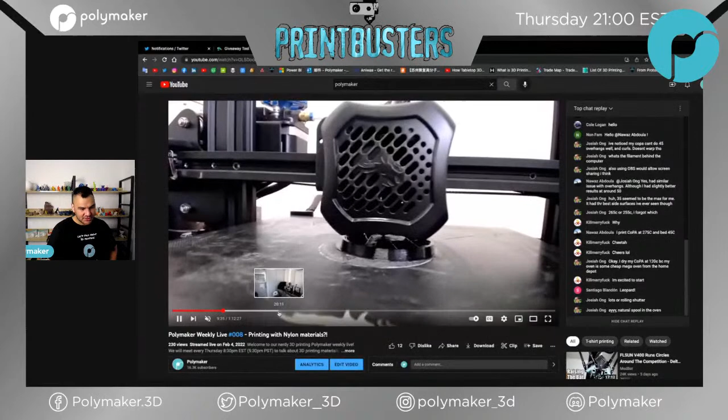Well, you're not seeing exactly that I started the print. Maybe later, I think I'm starting a print. Maybe I fail, maybe I asked someone to start for me before the stream. Let me check. Oh my God, I always talk too much.

Nawaz Abdoula was there, who else? Josiah was there, Loyal was there. Oh, I missed some of the names. Let me check, yeah maybe did I? Oh yeah, I think I started one, at least one. So here's the proof that I may be able to use a printer.

Everything causes warping.

Has Nick ever printed on stream? Pretty much that's how they do it, I would say. But then it's strange because I look at the chat and it's below, but it's okay, close enough. We're looking forward to seeing your print. Hey, Sweetie Q, Stephanie is here.

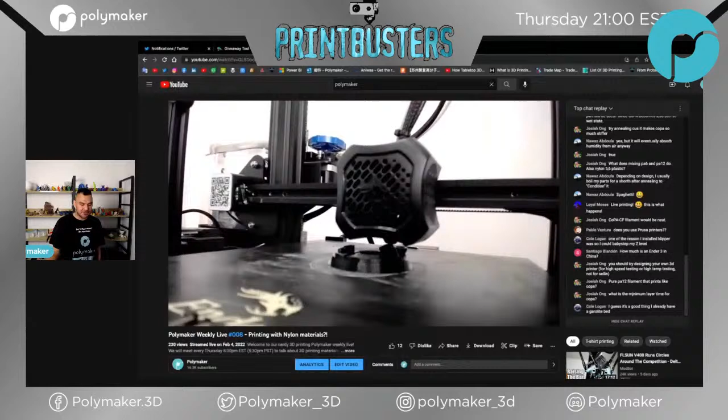What is Click Print? Click Print 3D - you should have followed last Wednesday's stream, but no worries. I will be using this pretty much all the time now that I have my printer at home.

Kenneth Tseng, so happy you have YouTube right? Fake news, look at this. People were saying it's impossible to print CoPA, the material scientists say, blah blah blah, and then that's what I did on stream. I explained my setting and stuff. At that time, I could not share my screen, so I think I was showing off the setting by just putting the camera pointing at my screen.

So I have to say it's very disturbing to have the setup reversed, so maybe I will put it back. It's so disturbing, like usually I have the chat here and then I'm interacting with the camera, I just see the chat. But now I'm looking here and I'm like, I don't know.

I feel too strange. Click Print is a remote management and monitoring software, see Nicolas' last video. Yeah, I'm not sure if people are gonna go through the 3 hours to know what Click Print is. I think maybe on 3DQ YouTube there is a summary, because if someone asks hey what is Click Print 3D, and then we link a 3 hour video, yeah it's not gonna work.

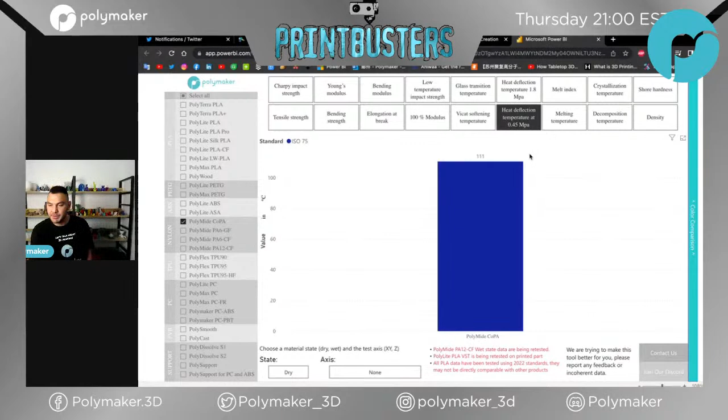On the material comparison chart, do you have a way to see things under load for heat resistance? Yeah, the HDT, that's the one I just showed. So HDT 1.8 and HDT 0.45 megapascal, there are two standards for the load. So this is what you can check.

So much to touch, yeah. I don't have any friends to play a game with. I want to print some games so badly.

Really? With family, maybe family games or something like this? During Christmas? Yes, make anything tree. And I just sent Make Anything our collection of PolyTerra. I just sent him, and I'm so looking forward to what kind of product he can make with it. I mean, I love his creativity, and that's why I sent him this.

And I didn't know, but he has a Discord. If you guys didn't know, where is he? Make Anything, he has a Discord, there you go, this one. So if you wanna join, just let me know, you can ask in our Discord and I will share the link. It's pretty cool, I didn't know he had one.

I think he's slowed his content recently, so I'm looking forward to some of his new projects. Toy Maker changes the design a little bit and names it not Mechagodzilla but Atomic Dragon, so there's no problem with copyright. Oh yeah, makes sense.

You know, the camera adds 10 pounds, 10 kg. Because I have a wide angle, so the closer the bigger I am, and the further the thinner I am, right? No, but I'm losing weight so that I look good for Earth. That's why, no actually I'm joking. Do you know why I'm losing weight? It's because in the US I eat so much, so I need a buffer, so that when I come back I'm the same weight. So I'm building my buffer so that I can be free in the US.

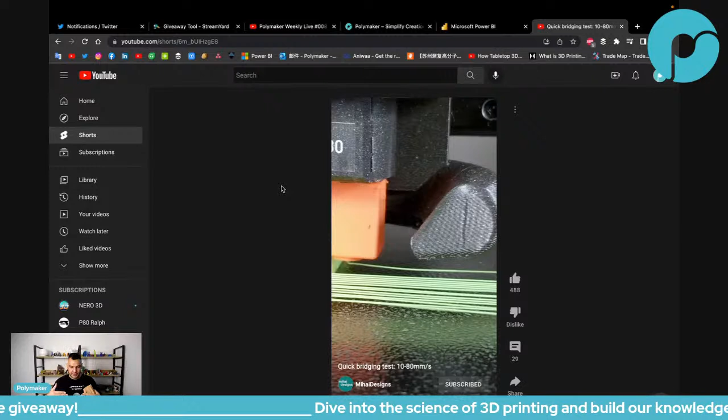I don't know why it's doing this, because theoretically, if it deforms, the polymer is under stress, so it should be very easy to come back just by pushing the other side a little bit. It would come back directly, because it's not its equilibrium state. You just deformed it. But if you heat it up, all the molecules rearrange so that the dent is suddenly the right state. So I don't understand why if you cool it, it comes back. This I don't understand.

The molecules shrink, it contracts. Yeah, but that doesn't explain it. Because you're heating it up, so you're basically removing any stress from the part. Yeah, that's a good question. Bad company, I don't know. Maybe there's something about bumpers that could explain it. I would have to look at how bumpers are made, or I don't know.

I have no idea, but anyway, I was comparing it to what you're talking about. Yeah, but I don't see the comparison actually. I don't know how to make the analogy. Oh, so do you mean you know why it's doing that? That's why you can compare. So if you don't mind explaining, why if you heat up and then cool it down, it suddenly changes shape. I mean, it's like me saying...

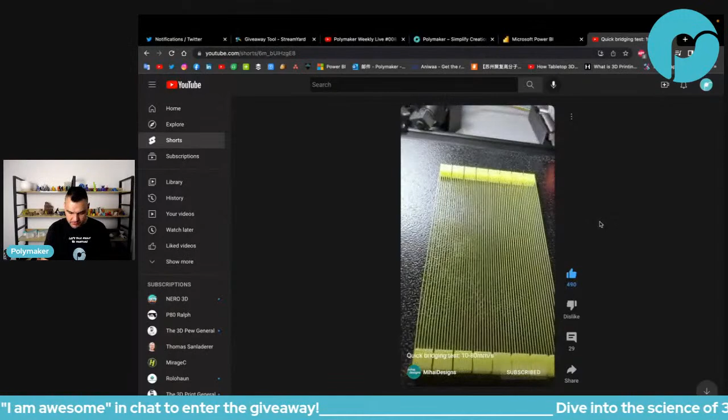I'm running a printer bridging test to find the optimal speed. The lines are sagging at first because they're still melted, but they straighten up as they solidify. Fascinating. So here they are, from 10 millimeters a second up to 80. And it looks to me like the faster they go, the better they look. I'm gonna have to try higher speeds. Stay awesome, stay awesome, yeah.

So bumpers are made with bumper shape memory. Yeah, I mean shape memory is different. Shape memory polymers is different. And actually shape memory polymers should be the opposite, or at least the one I know.

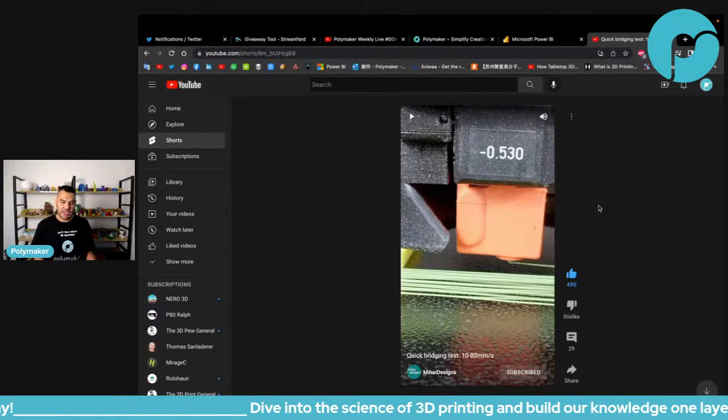The one I know is you can, when it's cold or at room temperature, move them wherever you want, and if you heat them up, then they will come back to their equilibrium state. So it's the opposite. But maybe you could do the opposite, I don't know. So basically, the filament contracts after cool down due to thermal expansion. Chris, do you think so?

Remember that the only factor that changes here is the print speed, not the temperature. But thank you for giving your hypothesis. Please continue giving your hypothesis on why, if you print faster, the bridging looks better. Chris is saying maybe it contracts more because of thermal expansion, but my follow-up question would be: the temperature doesn't change, so why would some contract more than other if the temperature is the same?

Hey Maziri, thank you for being awesome. By the way, your profile picture is definitely showing who you are, Maziri. You cannot hide.

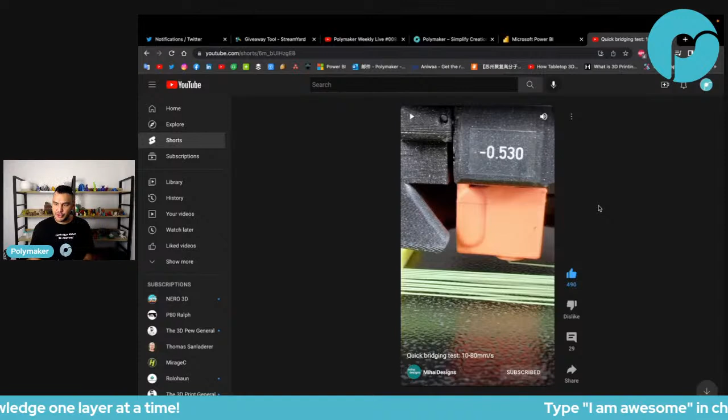What I mean is that the material has the option to cool down fully before the bridge is finished on the slow bridges. Let me read that again: the material has the option to cool down fully before the bridge is finished on the slow bridge. Okay, so how does that explain that it sags more than the other one?

Kind of like the camera that moves out of the way to take a time lapse. That split second of slower speed, it cools down.

Okay, because the amount of material that is extruded is exactly the same. Come on, more hypothesis, more explanation. What is happening there? Why is the higher speed better?

Hey, Robert, thank you for being awesome. He's out of order. How are you?

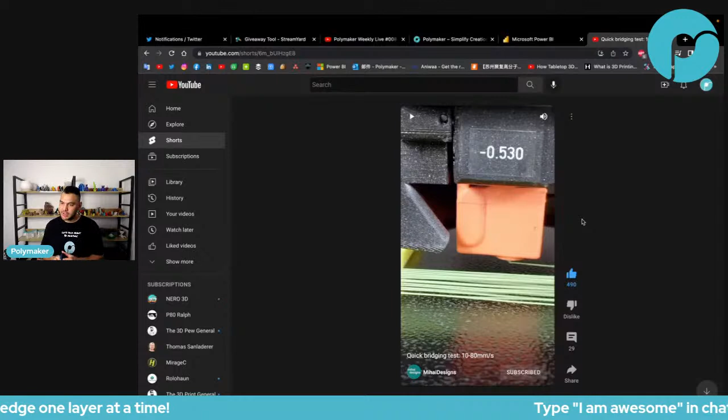Time exposure, longer to heat, with slower speed. Fast speed, less time to heat. Yeah, Bob, this we agree: even though the printing temperature doesn't change, the actual extrusion temperature changes. The filament that is printed at fast speed is actually extruded at a slightly lower temperature. This we agree, no problem.

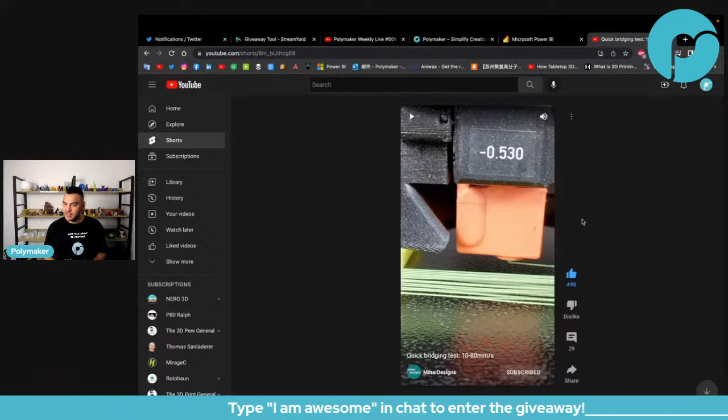Faster, it doesn't lose heat at the hot end.

I know you guys, it's not easy to explain everything in the chat, right? Just because the chat is limited and stuff, that's why I'm trying to make sure I follow your way of thinking.

That the slow printing bridges can compensate for the thermal contraction, which it can't on the faster one. And so it pulls together on the faster bridges.

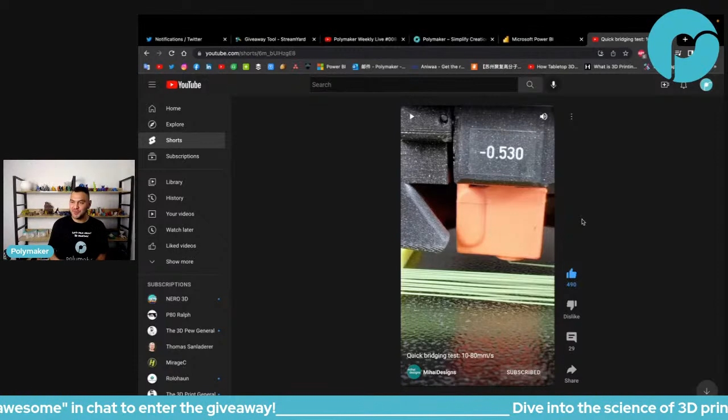Well, the first thing I notice is you guys really love the thermal expansion theory, right? You don't want to let go of the thermal shrinkage theories. Nobody has any hypothesis on the other side, which is normal, right? I think I'm the only one in the world that supports the other theory.

Got some Polymaker glow in the dark today. Nice, out of order, on time for Halloween. Missed the notification you were streaming. Dusty Knuckle, you're not late.

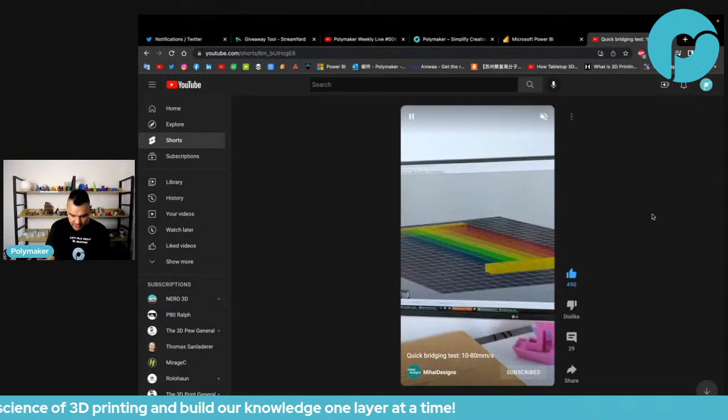We just started, we're trying to make some hypothesis on why this is going on. I can loop the video of a printer bridge so you can see what's going on. The faster you print, the better the bridge. Gonna get it calibrated and printed.

Thank you for being awesome, DMAT and Dusty Knuckle.

Okay, the bad company. Well, as for the time lapse, I've seen videos on this because the hot end temp changes cause little drops. When he turned time lapse off, print was perfect. Oh, okay, but I think we're talking about two different things, no? Can there be a better chat?

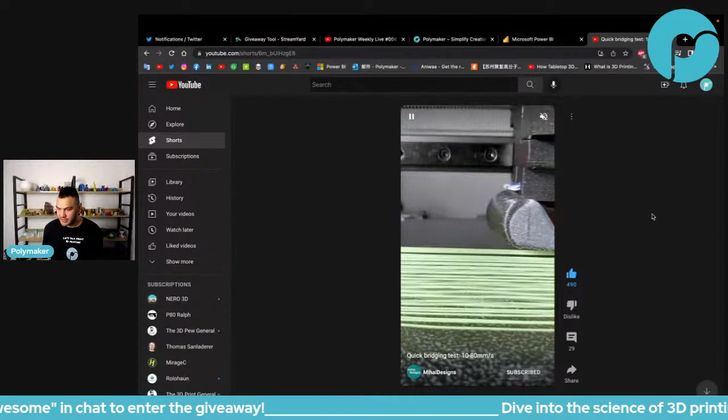Hey, Luna Bird, how are you? Eric, right? The Polycast expert. Welcome to the chat. What do you mean by a better chat? You're usually on YouTube, right, Luna Bird? Luna Bird is, I think, one of the only users that knows material better than us. I don't think there's any user that knows Polymax PLA better than us or Polysmooth better than us, but when it comes to Polycast, I think Eric knows more than us. Maybe not the formula itself, but at least the experience, much more experience than us.

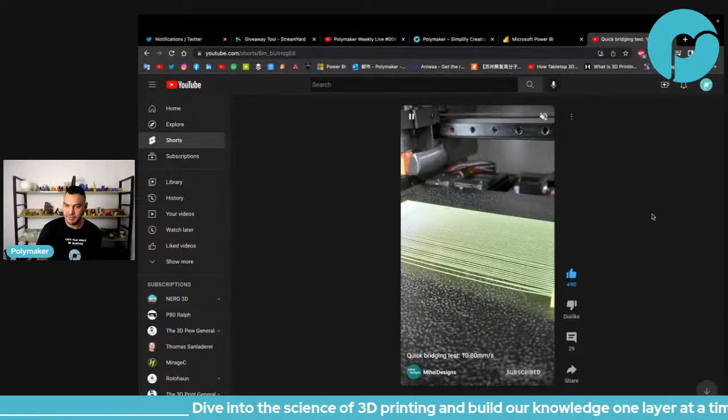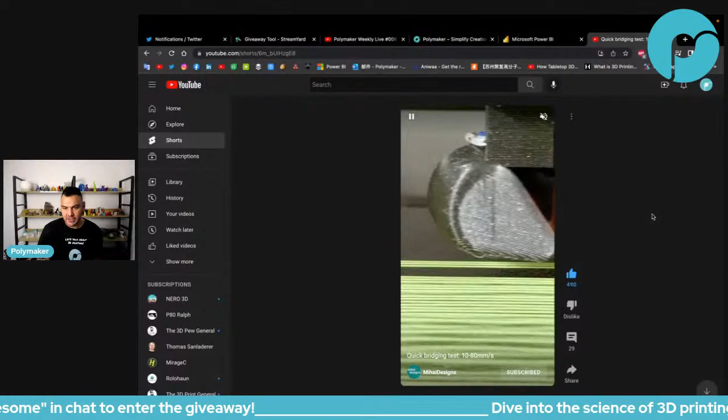I thought he kept the same temperature, just sped up the bridging speed. Yeah, exactly, Papa Bear. The temperature is exactly the same, or at least the printing temperature is the same, but the speed is different, and the speed is making the bridge look better. We can see that the higher the printing speed, somehow the higher the phenomenon of the material shrinking and stretching.

Okay, custom creation elasticity. Bob has another idea. At slow speed, it sags because it's not getting pulled - it's pushing a melting plastic forward. But at high speed, it's pulling a melting plastic, so no sag.

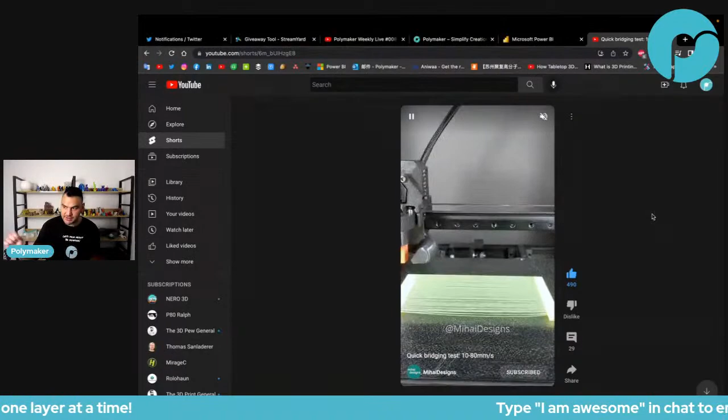There is still a sag - you can see here in the video, it's still sag. The difference is at high speed, the sag doesn't stay. At slow speed, it sags and it stays there. At high speed, it sags, but somehow it straightened.

Kenneth saying, thank you for being awesome.

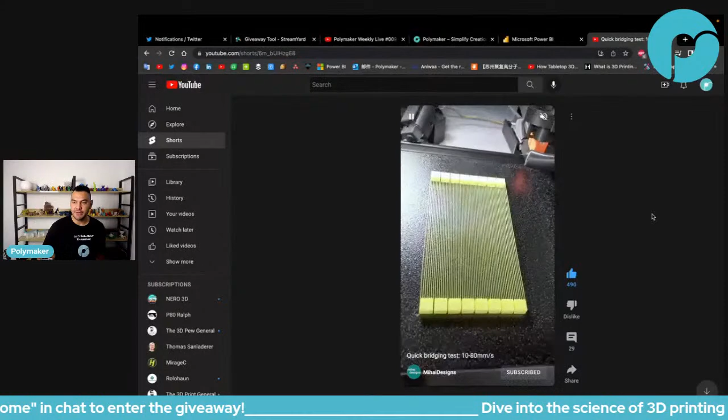What we can definitely agree on is that the faster bridges first sag and after that straighten out. Yes, agree Chris, which means it has to contract for some reason. I 100% agree. I think the discussion is going to end up: why does it contract? Is that because of thermal shrinkage? Is that because of elastic shrinkage? Is that because of something else? But totally agree on the first step of the reasoning.

NSTO says fast bridge is like rubber band stretched by hot end, so after cool down it shrinks a bit. Slow bridge is well melted, so it's like a plastic string, not much elastic there. That's for me the best explanation, but I'm a little biased because that's the one I know the most. So I guess today we will be more on finding out whether there could be another explanation for that.

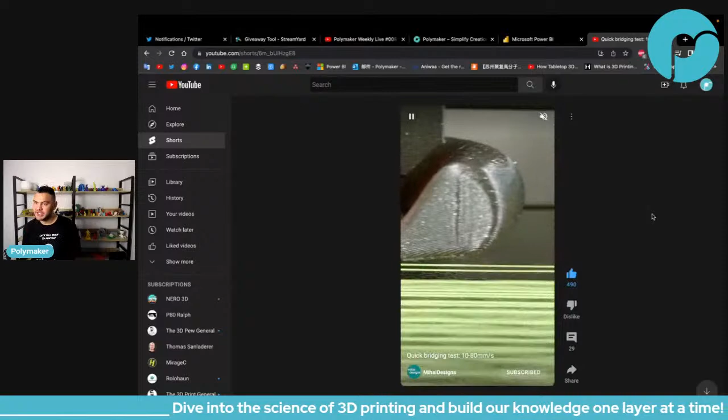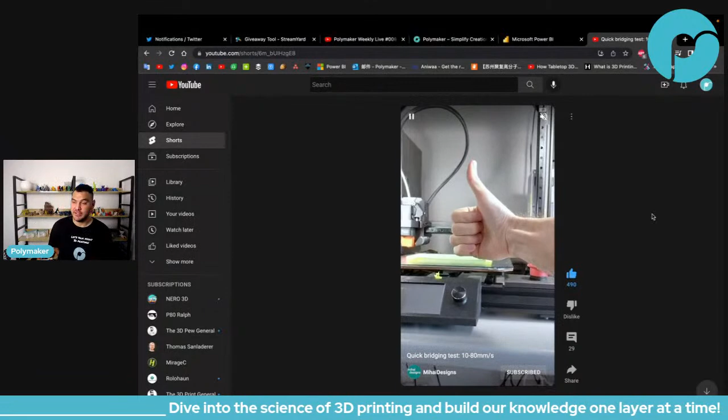Major Gamer B says I need to work on my bridging with Polymaker ABS on my Prusa MK3S. Yeah, try bridging, try the cooling, maybe adding some custom cooling fan during bridging, or try printing faster like this guy is doing - maybe try to print faster just for the bridging. I think you are able to change to custom make the setting just for bridging.

Luna Burns says skip the chat - so it's additional tension formed from the increased speed.

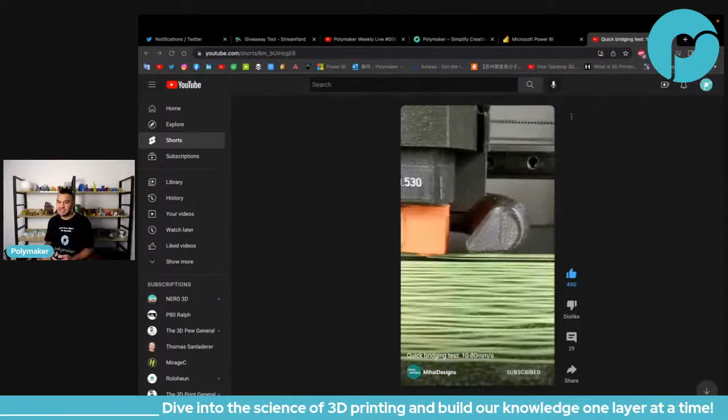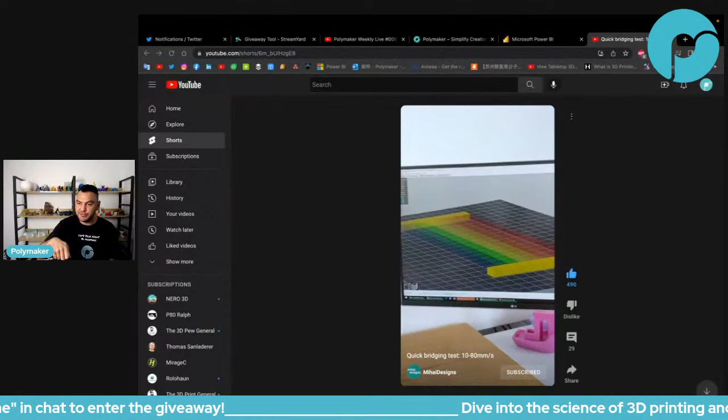Let me give you my explanation, then you can give your hypothesis. My hypothesis is the same as my explanation for warping: the higher the flow in the hot end, the more stress created in the polymer, so the more polymer alignment you create. That alignment, after being extruded, comes back to an equilibrium state. So when printing slow, it doesn't create much stress in the filament - it just sags, it doesn't contract much. It does contract a little because there's still some stress, but not as much as if you push the filament quickly through the same temperature, which creates a lot of stress. The polymer is like this, and when you force it through the die, it straightens, and after it's extruded, it comes back - that's creating the shrinkage. The higher the printing speed, the more you straighten the filament. That's my hypothesis, so you have to challenge it by asking questions to see if it's logical, and make some other hypothesis we can study.

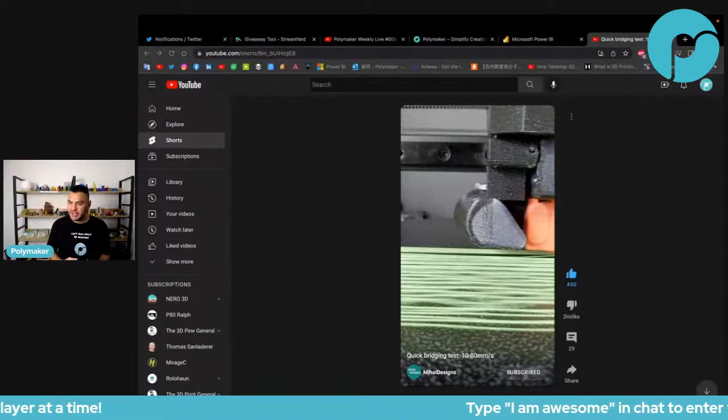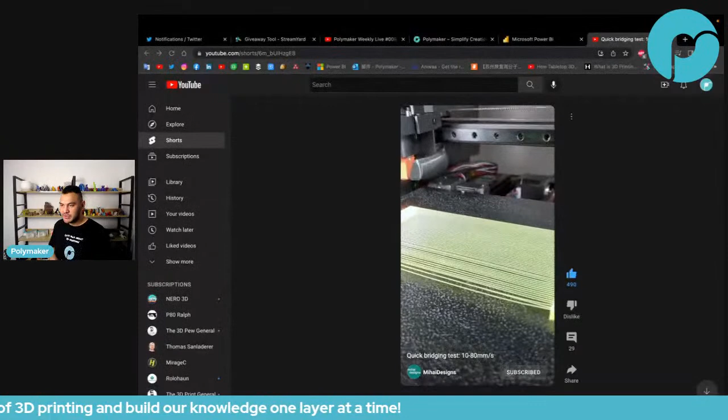So my theory, F-dash: the faster you go, the lower the heating time on the nozzle, plus the extruder pushing harder to extrude the needed filament, gives you higher stress. So when it cools, the molecules relax, trying to return to the coiled state, and this gives it more tension, raising the bridge.

Yeah, F-dash - basically what I just explained is what F-dash explained in a better way. Hey 3DHP, how are you? Thank you for being awesome.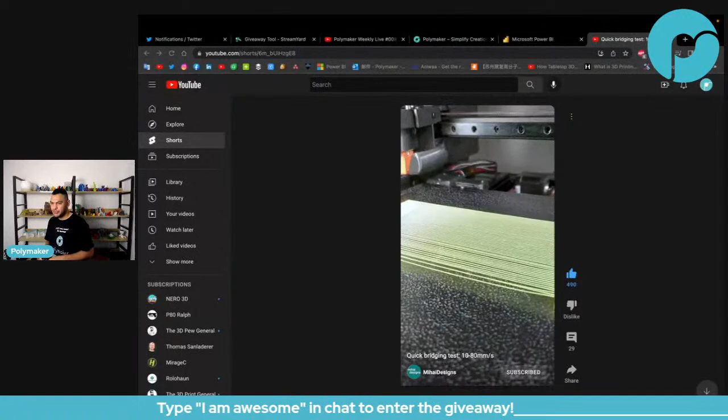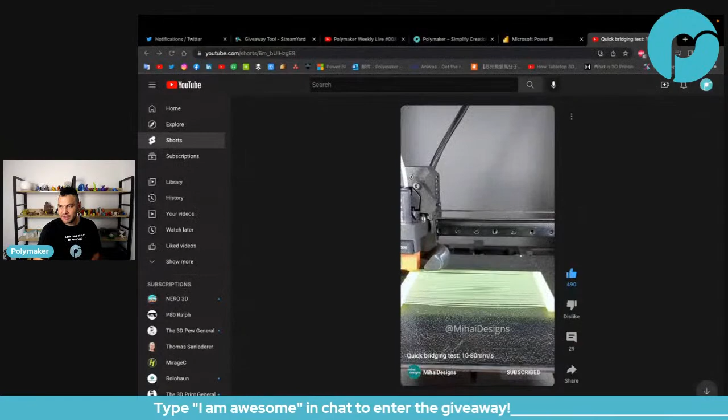Papa Bears says faster bridge will probably pull a tighter strand extrusion and cools faster, giving less cooling time than slower bridges. I'm not too sure how to connect that to the fact that it's stretched - maybe it's missing a part. Because I think the cooling time is the same for all of them, right? Because even at the end we leave it to cool down, but it's still sagging for the first one.

Third idea from Bob: the slow speed cools more. Yeah, again I don't know what it means. The slow speed cools more? But they all cool down to room temperature, right? There's no part of the print that's in the fridge and another part that's outside the fridge. They're all in the same environment, so they should all cool down to the same temperature.

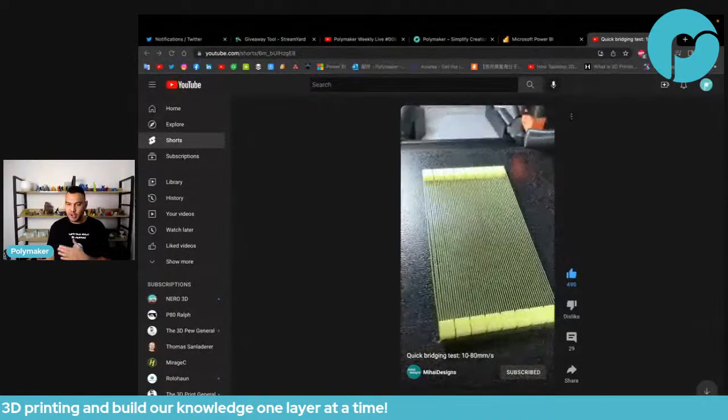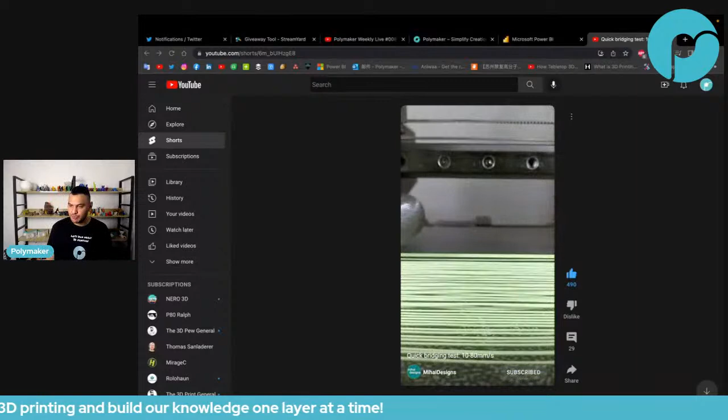Or maybe what Bob is saying is that the slow speed means the extrusion temperature is higher, so there's a bigger difference between when it comes out of the nozzle and the room temperature. Let's consider that's what he means - the temperature delta is higher at lower speed because... at high speed it cools the outside, the shell, but not the core, and after some time it fully cools and shrinks, pulling tight.

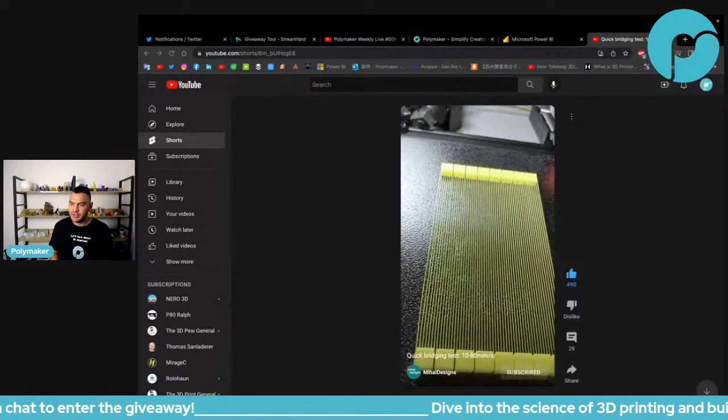Yeah, I'm not sure about this hypothesis - that at high speed it cools the outside, the shell, but not the core. I think it's not big enough to matter. I think that would apply to huge stuff, like if you extrude something 50 centimeters in diameter. Maybe, but for something this small, I'm not sure. I wouldn't say so.

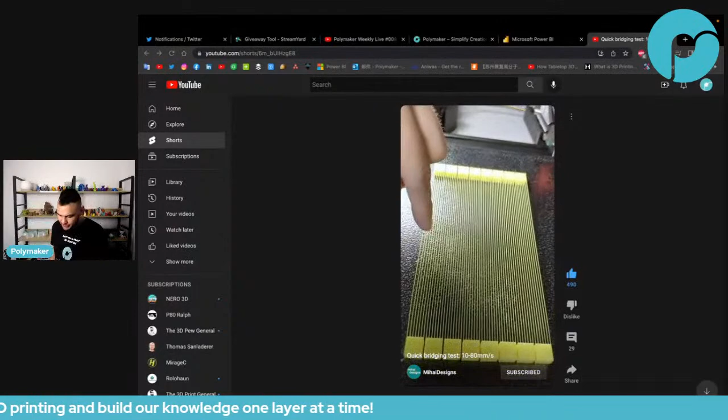How much does crystallization play a part in these filaments? Nothing - I'm pretty sure he's printing with PLA, so nothing. If it was semi-crystalline, if it was nylon for example, then it would play a role. But for this one, no.

I know that with polymers like POM, it's not thermal contraction but contraction because of crystallization. Yeah, same with nylon. Why does nylon warp? It's not because of thermal contraction, it's because of crystallization, and that's why we were able to develop warp-free technology - because we understood it has nothing to do with thermal contraction.

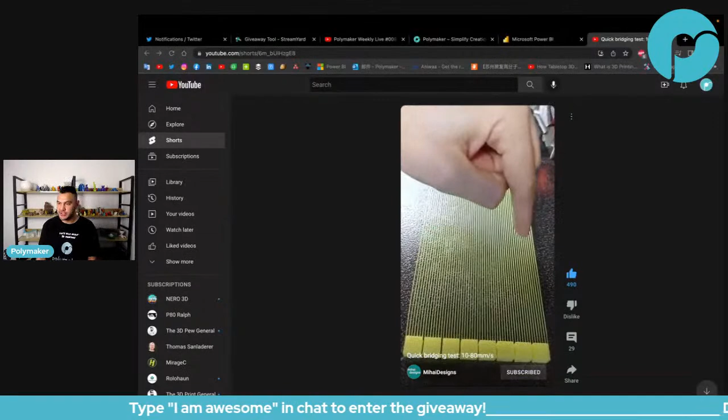Major Gamer week: I was doing a temperature tower with 15% cooling for the first layer. Yeah, I think cooling will help you a lot.

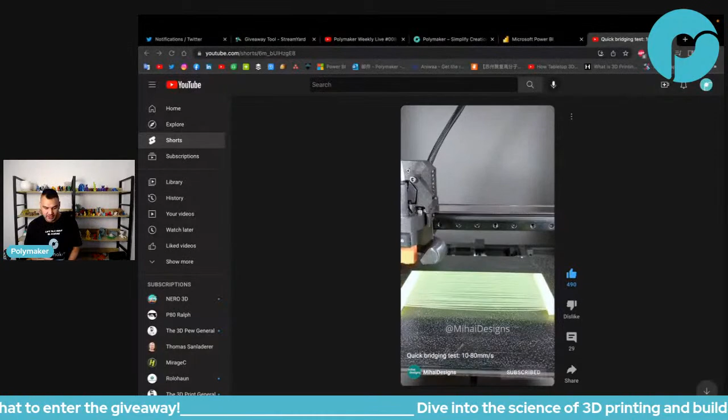Okay, Bionic says: at slow speed, I would think part of the shrinkage is already done when the nozzle reaches the other end, so the string doesn't shrink as much. But they should shrink the same amount, right? The amount of material you're putting between here and here is exactly the same - the volume of material from point A to point B, whatever the speed, is the same. So at the end of the day, they should all be the same.

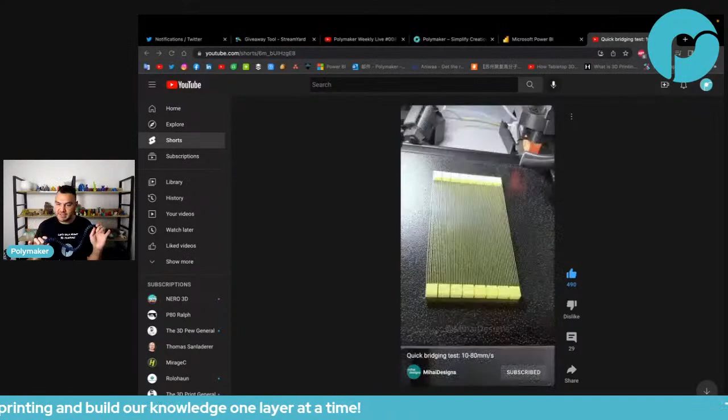If that amount of material at 25 degrees for a string of, say, 0.2 by 2 by 0.4, whatever the dimensions, it should all have the same length. Unless it means that at slower speed, the diameter of that filament or string should be smaller than the other one. Then yes, for the same volume, one will sag and one will stay straight because it's thicker. But I don't think that's the case. What would explain the slow one being thinner than the other? That would explain why, for the same amount of shrinkage, one stays straight and not the other.

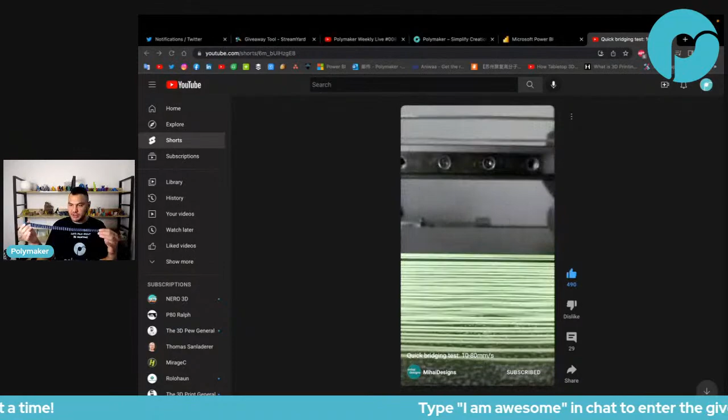Do we know for a fact that the nozzle is identical for all speeds, and that the extrusion rate is the same or compensating for the higher speed? Do we know for a fact that nozzle temperature is identical? Well, we know for a fact that he didn't change the temperature in his slicer.

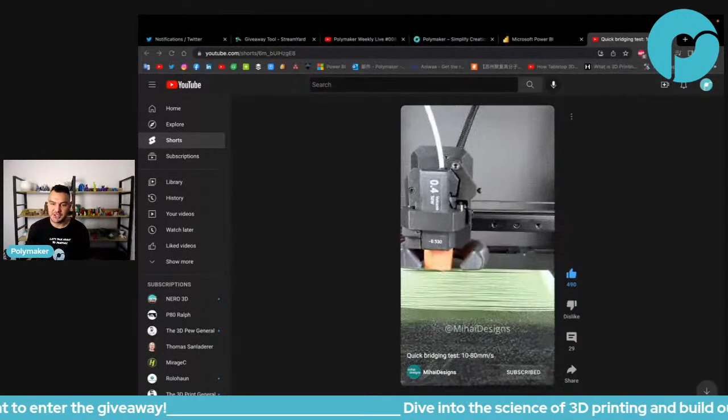Whether something happened to the nozzle and it suddenly changed temperature, I don't know. But we know for a fact that the temperature didn't change - in his slicer, only the printing speed changed. And do we know for a fact that the extrusion rate is the same? No, it's definitely not the same, because the printing speed changed.

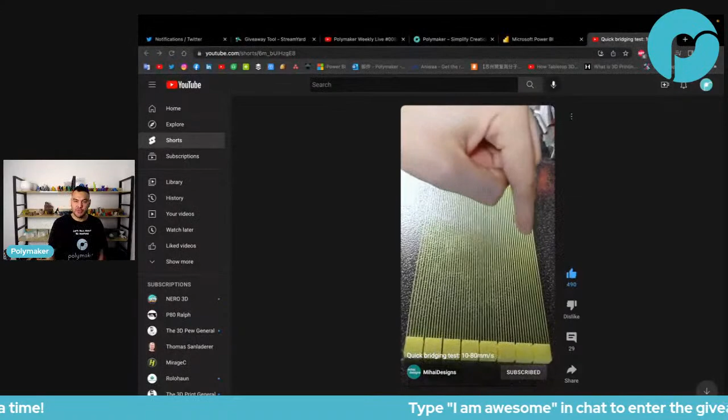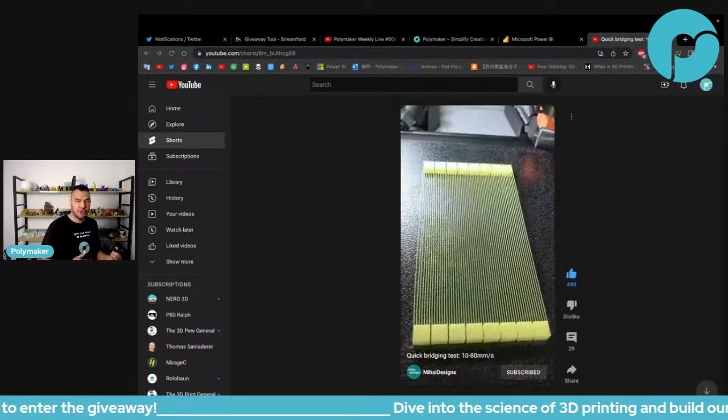And I'm happy that you guys are investigating more than thermal shrinkage. Because how many of you have printbusted around some forum? You go on the forum and do your Printbuster things. What is the Printbuster thing? Basically, ask people some question and then challenge a little bit all the thinking. You will quickly realize that in the 3D printing community, you only have one knowledge that is just shared everywhere.

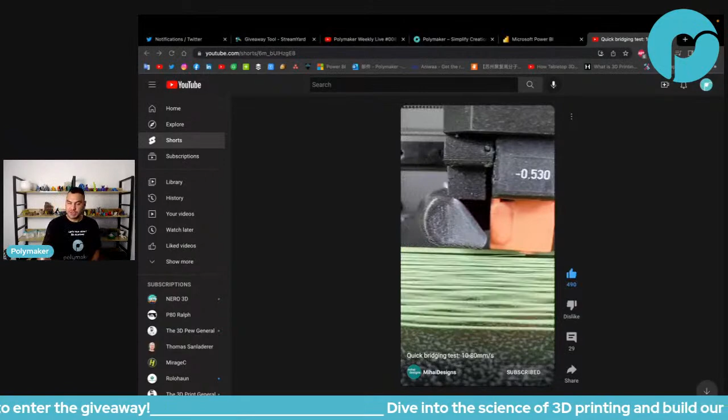Nobody is questioning the 3D printing community's common knowledge. If you have to print a Benchy at the beginning, you print a Benchy. If you have to print a calibration cube to calibrate something, you just do it. You have no idea why a calibration cube is useful for calibration, but you just do it. If warping is about thermal shrinkage, then that's what you're going to say everywhere. If someone asks, oh my part warped, yeah it's because of thermal shrinkage, so you have to do this, this, this. And Printbusters was all about that, thinking outside of what everybody thinks.

And all the topics were about that, like wet filament, surface quality, nozzle, blah blah blah.

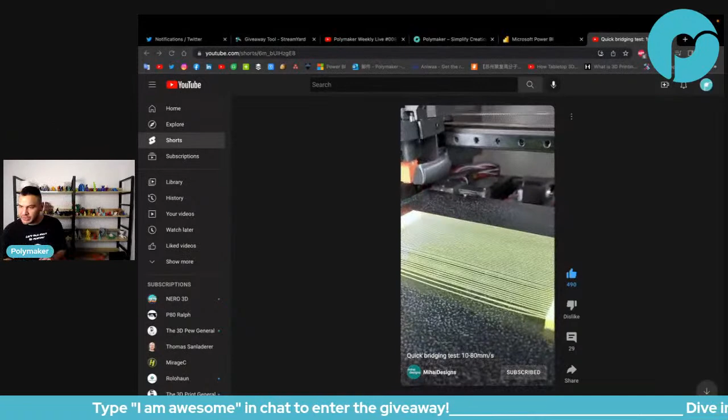My name is Beverly. I own a brick and mortar 3D printing store in Raleigh, North Carolina. I'd love to carry Polymaker. My entire 3D Zoom chat is here watching. I'd love to get in touch on how I can stock your product.

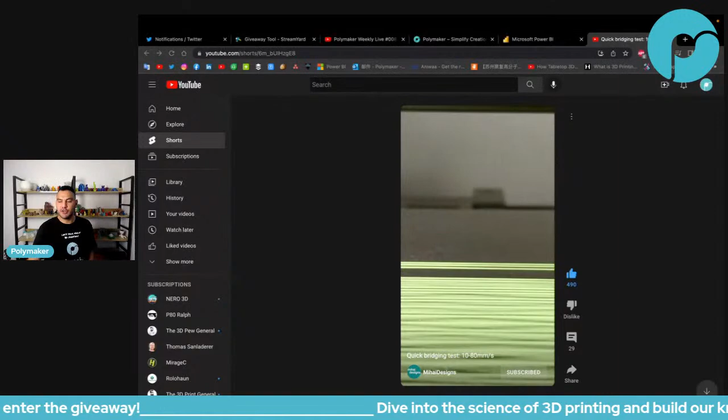We were in North Carolina before we moved to Texas. You can join our Discord if you want, and then you can contact me directly, and we can discuss this. My entire 3D Zoom chat is here watching. Hello everyone from the Zoom chat, from Beverly. How are you guys doing? Hey 3D Musketeer, you should talk to Bev. Yeah, I just did, just add me. Beverly, just type 'contact' or 'Discord' in the chat, and you're gonna have all the information.

By the way, I love a real showroom and real shop for 3D printing, because you have to show some stuff, right? Let me put it full screen again. If someone comes to your shop and you're selling a nice metallic blue PLA, and then you have this guy in the showroom, who is not gonna buy that product, right? Who's not gonna buy? Or you have a bunch of models. It's much easier to convert people when you have all this nice stuff.

NSO Mirage C mentioned something about surface tension, but I don't know how to make it reasonable here. Yeah, I saw that. We're gonna check Mirage C's hypothesis. I'm going through your hypotheses first, you guys' hypotheses, and then we're gonna check what Mirage C, the one that was on the Discord, said.

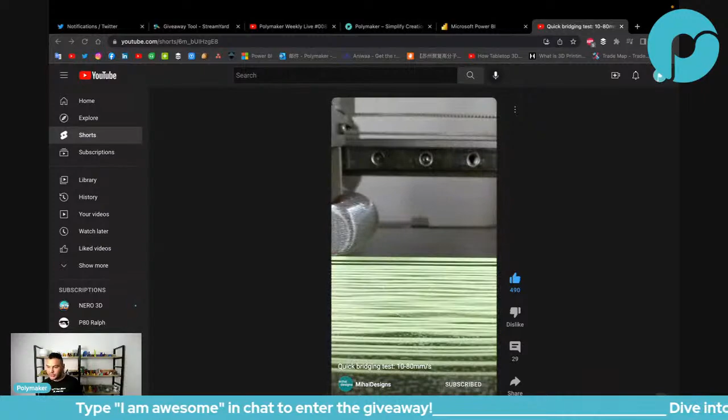Beverly, you'll also love the community and support. Yeah, you're gonna love our community, Beverly. We have a lot of awesome stuff. Ecovate 3D, that's the name of your store. Let's check it out. Who is in North Carolina in the chat or around there? Ecovate 3D, okay, we're gonna move there.

Oh that's cool, they also have pictures. Ecovate 3D, one-stop 3D printing shop in Glenwood, South. Printers, filament supply, maintenance, repairs. Oh, they also have some classes. How cool! I wish I would have some 3D printing classes, like with all my friends. And then you have a teacher with a printer, or we all have our printer. I wish I would have something like this, but unfortunately 3D printing classes didn't exist.

Shop all, okay, what filament do you carry so far? Oh they have some, let's check. They have Sunlu, but it's sold out. They have a twinkling blue, it's pretty nice, I think it's from Sunlu also. GST PLA, okay, PLA Plus. Pink chip marble, oh we don't have that marble, it's pretty nice. What else do they have? Oh, unicorn, mermaid, sunset PLA.

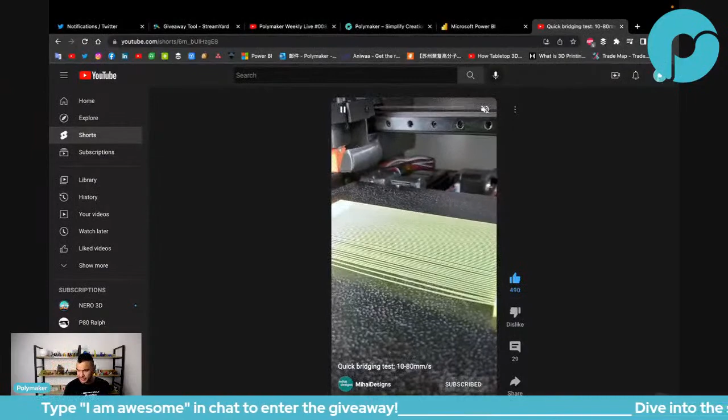Maybe, but it makes sense because metal has some similar property. Blah blah blah, Zembender, awesome. Papa Bear is awesome. Forrest Gibson is awesome.

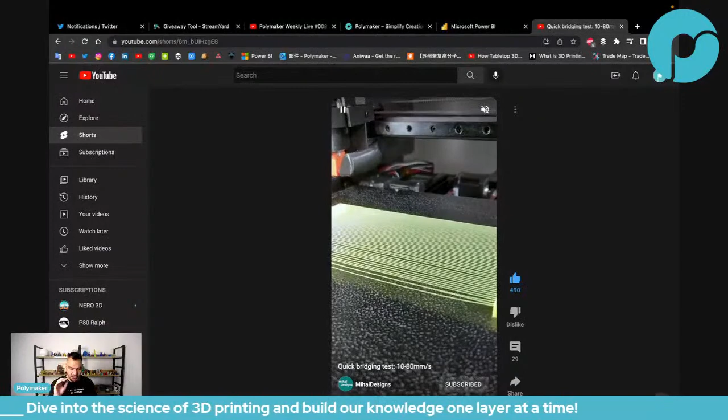Chris asks: if you would implement your warp-free technology with POM, would it be printable? Sorry for promoting POM so much. No worries Chris, I think it's a great filament. Yes, any semi-crystalline filament will enjoy the warp-free technology, however not each semi-crystalline filament has the same formulation to enjoy the warp-free technology.

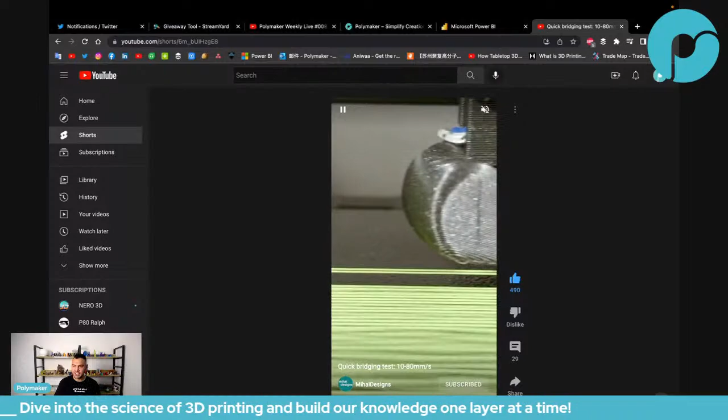Fluid has time to solidify in a curved shape, so it's not able to become straight. Slow, it has time to solidify in a curved shape, so not able to become straight. I'm not sure, but I'm pretty sure if you print a really long bridge, it's going to have the same result. I'm not sure about that one. I need to pass a little bit faster because I'm a little bit late in the chat.

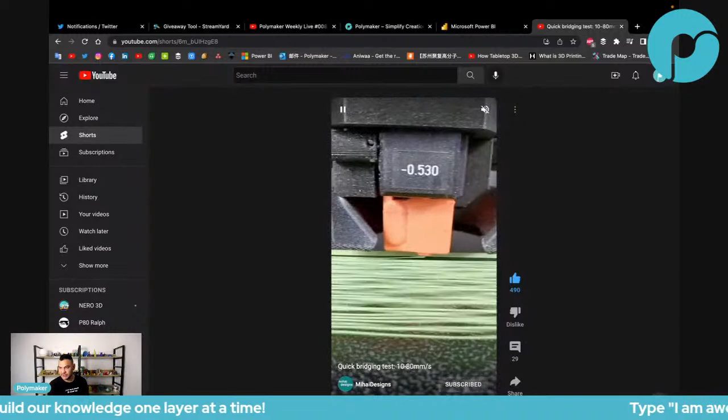We need more facts. We need to wait, from fast to slow. Yeah, we can just make some hypotheses here, but the hypothesis will help us know what kind of other tests we can do.

Because I know for some reason the community has a big closed door when it comes to thinking differently about warping. Every time I come and knock and show something, hey guys what do you think about this, how would it explain, then they open the door, they look at it, they say a bunch of thermal expansion stuff, and then they say anyway we need more stuff, and then they close the door and go back.

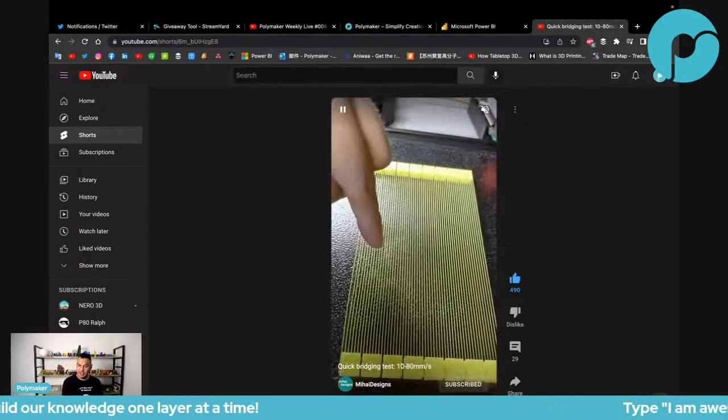Print a calibration swatch, print the truck from Zombie, blah blah blah. I have never printed a Benchy. You should have a badge for that.

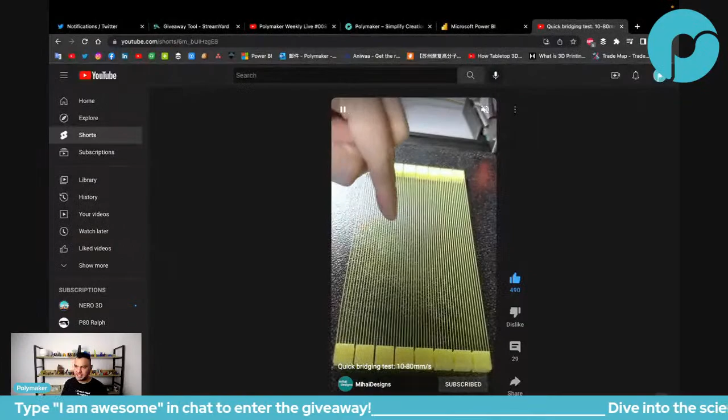So the volume is the same for every string, okay? But if the temperature in the slicer is identical, doesn't that mean the filament gets heated less inside the hot end before it's extruded, due to spending less time inside it? Yes, correct. So the core of the filament won't reach the same state as on the slower speed. Yes, correct. The extrusion temperature is lower and lower as the print speed increases.

Can't wait to chat. Yeah, just add me, and our goal is to make it accessible to the consumer, and we teach kids. Oh, that's great, that's great.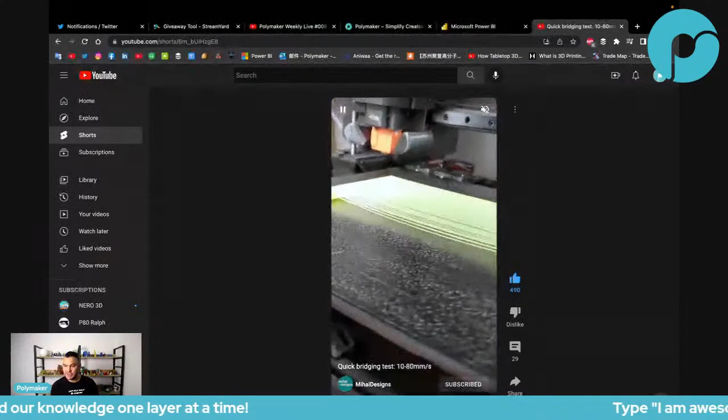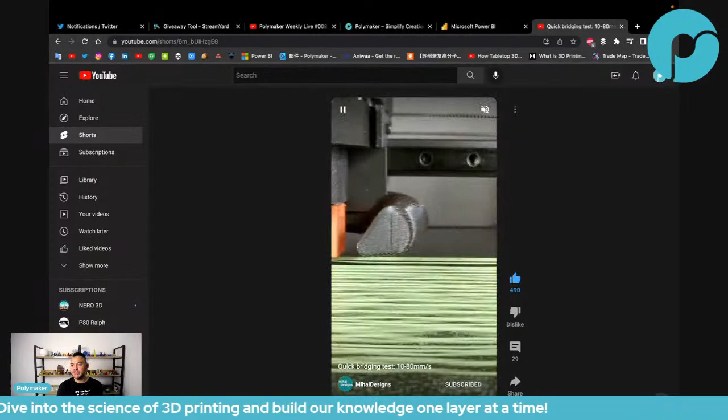The best part is people can see the product and they can ask me about how I've printed it and get inspiration. Yeah, definitely. There's also a lot of influencers and creators out there, maybe you can show some video of what I make. I really like spending time watching other creators, I don't make much stuff but I watch people making stuff, so it's great to keep people inspired. That's the reason why I like to sponsor a lot of projects, because I want to keep people inspired.

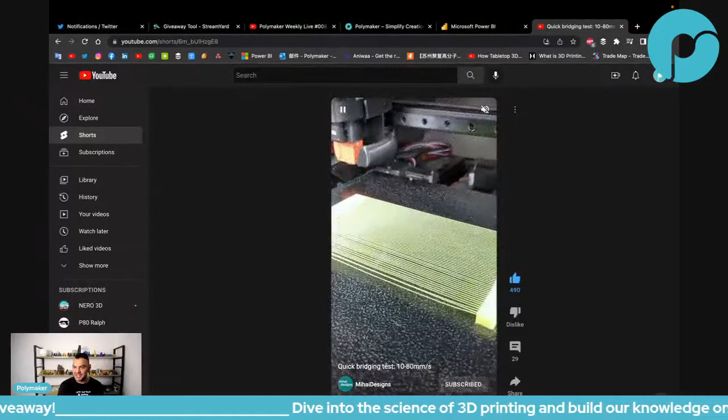Las Vegas, Jerry's in Las Vegas. Oh yeah, I know, Jerry's in Las Vegas, I heard that during his stream. 3D Medic Vines, I'm awesome, thank you for being awesome. It's been a long time since I've seen your name. It's so funny, now that I'm on YouTube I see some names I haven't seen since the last time we went on YouTube.

I'm trying to start some stuff to help teach on stream. Oh, that would be great, Zombie, like some kind of classes. Like, hey guys, from 8 to 9 we're going to learn about uploading an STL on a slicer and getting it ready on the SD card, and make sure you come back next week to learn how to print. Yeah, that's pretty nice, like online classes basically.

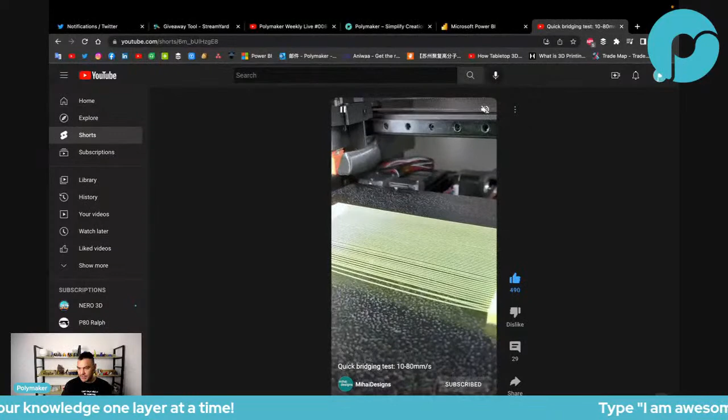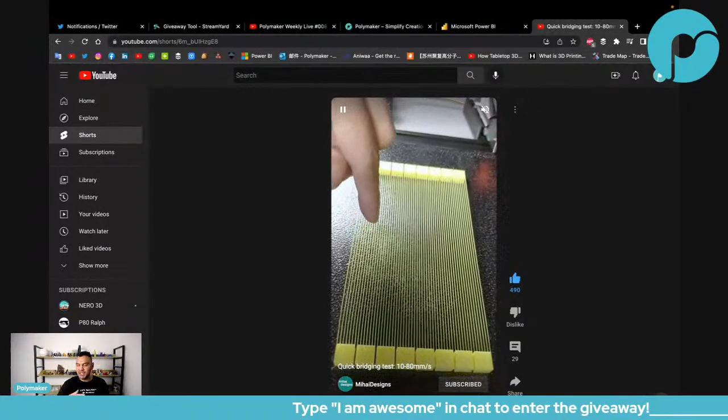Theory number 2, Bionic, gravity. Slow would mean the string is being pulled by gravity during a longer period. If we exaggerate and go super slow, the filament will flow by itself, like when a hot end is hot but not moving. So that explains the sagging, right? That explains the sagging. But it doesn't explain why one is stretching and not the other, right? It explains why things are sagging. And even if you print super slow and you're drawing more filament from the hot end, it doesn't mean you're going to have more volume in total, because the extruder itself is only going to push the exact same amount of filament.

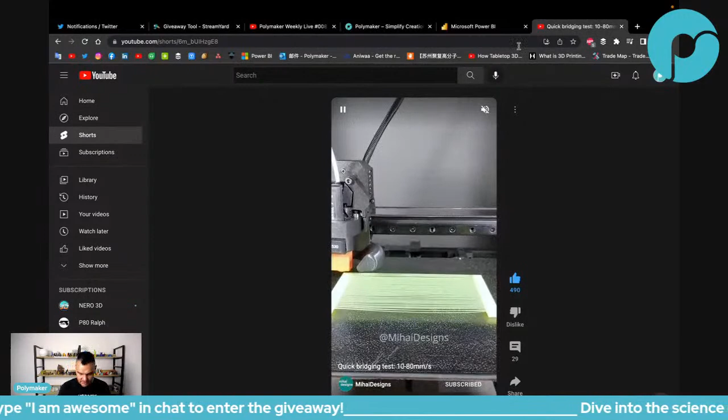So far we have Sunlu as well as CookieCAD. CookieCAD? What is CookieCAD, is that a filament manufacturer? That's a nice name, I like it. Oh yeah, 3D printer filament. Who has used CookieCAD before? Is that a good filament? It's such a great name. We just opened 5 weeks ago. Oh, you're very new. Okay, got it, nice. So you are into the entrepreneurship adventure, right?

Hopefully soon we will have Polymaker. Yeah, that would be good, that would be cool. The awesome squad, the awesome squad for the level 10, the Poly crew, the Busters, the Busters. Okay, CookieCAD. Oh, all of this stuff is from CookieCAD.

CookieCAD: 3D printing is serious and fun. It is engineering and playing, science and art. As the operator, you are the mechanic, designer, and user. CookieCAD fully embraces this dichotomy with tools to help you engineer so you can focus on the art. Much of the filament market seems to focus on machining and forgetting the art, boring colors and impersonal companies.

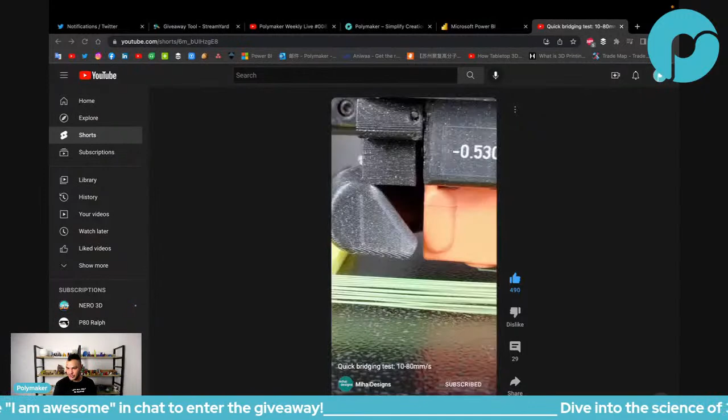Oh, you sell by the meter? We also sell by the meter. Do you know what I'm picturing when I hear we sell by the meter? It's like when you go get carpets, or for example in North Africa, in the shops in the street, you have all the carpets on the wall on big rolls, and you go buy by the meter, you pull everything and they cut it, like cloth or something. So I'm thinking about a massive spool of filament, and you come with your spool and buy by the meter. You're like, okay, I'm gonna take 10 meters of this, and 20 meters of this, that's how I picture selling by the meter.

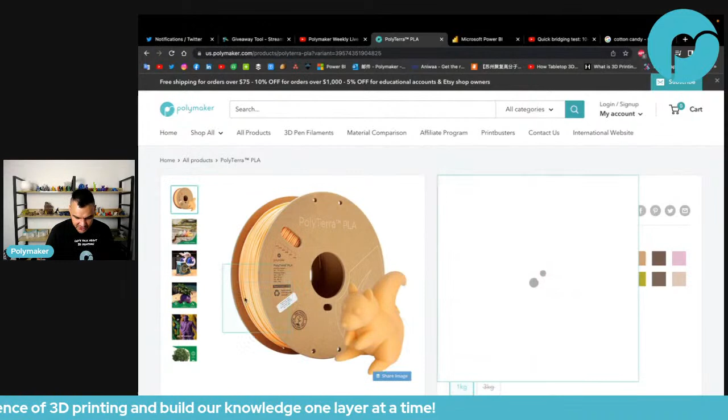But it's basically pastel colors, right? I mean, we do have pastel colors. This can be the pink cotton candy, we have an ice one. This can be the other cotton candy, like the blue cotton candy, and that's basically the pastel color. And then you have the peach, like all of this cotton candy with the ice. Yeah, I don't know, I'm not sure what you're looking for actually.

A bit choppy, or is it just me? Oh really? No, please, look at what I'm using, look at what I'm using. I'm using a cable, a cable, right? So no choppiness, no choppiness, please, no choppiness. I had to buy an adapter, I had to buy this, and I had to make this strange connection here, just so we can enjoy a proper stream in the office. We've never enjoyed a proper stream in the office, that's the first time. So please don't tell me this is on and off, oh no.

I'll also be at Rip Rap Fest in October. Yeah, really? You will? I will be there, Beverly. I will be there, so I will see you there then. Are you going to have a booth, or do you go there as a visitor?

Chocolate chip, the mix, it's pink blue. Barba Papa, yeah, so cotton candy means Barba Papa. Okay, do you know what Bionic said? Barba Papa means it's the name in French, right? And if you translate that from French to English, the cotton candy is called the daddy beard. So I guess when we say that, it sounds strange for you, right? Because I translated it literally. But anyway...

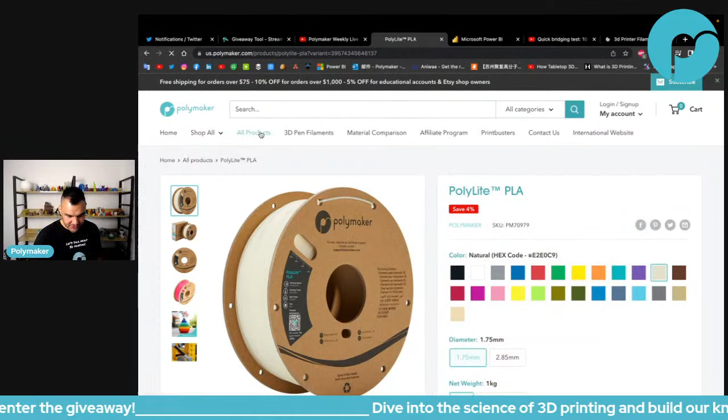One Raz is awesome and cute, and very old. I didn't know you also had colored marbles. Yeah, Cookie Cat, we do have a bunch of colors: PolyTerra PLA, PolyTerra Marble PLA, PolyTerra PLA Plus with a satin finish, Polylite PLA, Polylite Silk PLA, Polylite Galaxy PLA, Polylite Glow PLA, Polylite PLA Pro, Polylite Lightweight PLA, Polywood, Polymax PLA, Polylite PLA CF. I'm not going to go into the colors, otherwise I won't have time to mention all of them, but that's what we have at the moment.

We do have more engineering focused filament as well, but for art we don't have rainbow like this, we don't have that many marble colors. Oh actually it is marble - oh, you do have the marble with nice color. So we have that one, the vanilla chip, but we don't have these two. We have a slate gray, which apparently doesn't exist as a marble, and we are working on an ice cream series but we don't have this one. I think this one must be pretty popular - I've seen people asking for some pastel, ice cream colors basically, and this is basically ice cream, right? You type ice cream on Google, you end up on these colors.

John Stern on Twitch - yes, most of the people are on Twitch. I don't know what's the breakdown, how many people are on YouTube at the moment, because I only have the total, so I don't know what the repartition is.

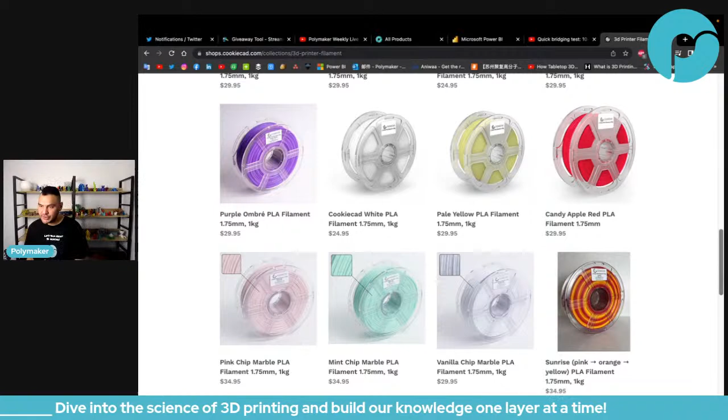Here everyone is, Little John Original: I had all kinds of sticking problems with the stock bed. Once I put on a heat top, zero problems after, no glue needed. Oh, I didn't know that company, heat top - is that a bed company also? I mean, a 3D printer bed company.

Oh why is it so slow? Let me check my VPN. Maybe I cannot use Google anymore - that's the reason. No, my VPN is good. What's wrong? Are you telling me it's the end of the stream? That's why you don't want to do anything anymore? Come on, what is it? Tell me, what is it?

Hey Subsector 3D, how are you? How's the Polysmooth going? Sorry I'm a little late in chat so maybe you came and already gone. I need to catch one of your streams soon, otherwise I'm gonna miss the Polysmooth project.

But anyway, so we have a new filament manufacturer here. What do they do? Ooh, they do a lot - I think they do more than Cookiecad. They are more focused on engineering. What do they have? They have PLA, flexible, and ABS. Okay, what PLA do they have?

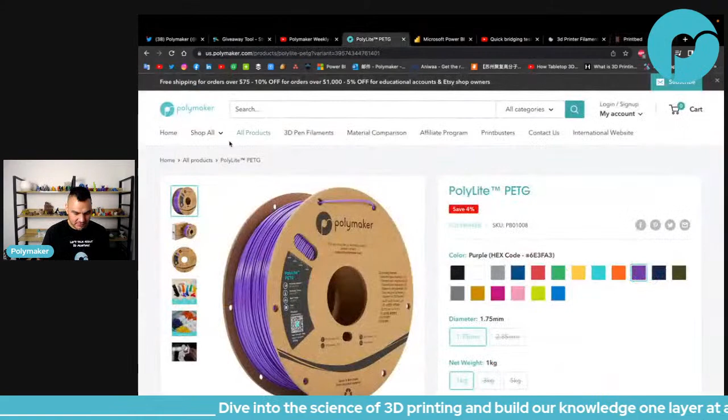I wonder if natural yellow is enough for Zombie. No, this is not yellow for Zombie. Zombie is very, very picky on yellow, and that's definitely not yellow enough for him. That's a bit of our yellow. Our yellow is like this, a bit orangey. You see, our yellow is natural yellow already, but their marketing is better, so they call it nacho cheese. If you look at the color, it's the same. The color is the same, but we are bad at marketing, so we call it yellow. We should have called it nacho yellow, nacho cheese yellow—then maybe we would have more sales.

Way more people here on Twitch. Yes, Kenneth Sang.

More people on Twitch. Do you need a special permission to be able to stream outside of China? Maybe not—Streamlab is authorized in China, actually, so even if I turn off my VPN, I will still be able to stream, because Streamlab takes the stream and sends it to Twitch and YouTube, but outside of China.

I heard of Futuna before. Really? No way, no way you heard about this island before. Not too many people there. Only 100 people on the island. Maybe not 100—in total we are 8,000 people on the 2 islands. Come on, 100 people, come on, we are 8,000 people, in the whole country, 8,000 people. It's huge, big island. I thought Kiribati was in the middle. No, Kiribati is huge compared to Futuna.